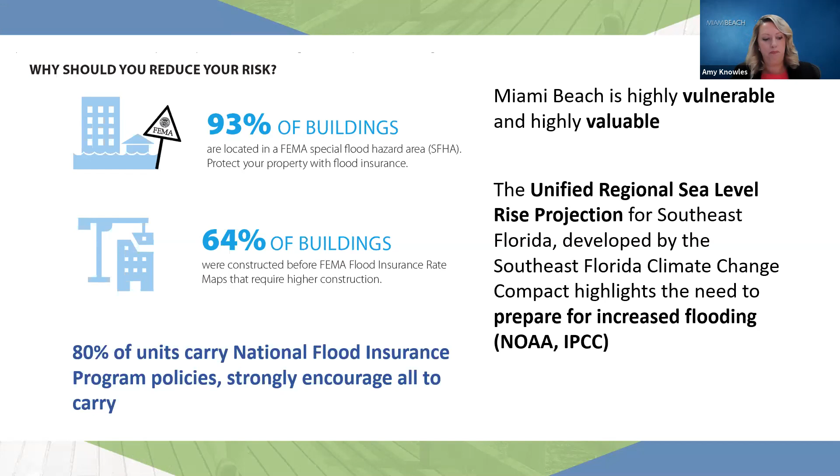So I mentioned every property is unique, and there are benefits of investing in protecting against flood risk. It's very important to note that often there are studies saying that sea level rise in South Florida is in the news. This week, we are always hearing new things, but it's important to note that that's if we do nothing, that the risks we face are if we don't adapt and if we don't make these investments.

So we have also very great recent studies showing the benefits of investing. Most recently, we have a business case analysis of our stormwater program, and that demonstrated that at least $2 billion of investment is reasonable and conservative based on the study assumptions. It demonstrated for every $1 that you spend in your private property, you get $3 in returns, and that city investments in the right-of-way increase property values for each foot of elevation, on average 4 to 14%. So that was a peer-reviewed economic study demonstrating from the city perspective.

More regionally, the Southeast Florida Climate Change Compact worked with the Urban Land Institute and AECOM to do an analysis of our 4 Southeast Florida counties. And that methodology and approach was a little bit different, but also very clear of the major benefits, about 9 to 1 return from Miami-Dade County community-wide and 5 to 1 at the building level. So again, some really good information to demonstrate the importance. Every property is unique, but it's important to know the values there.

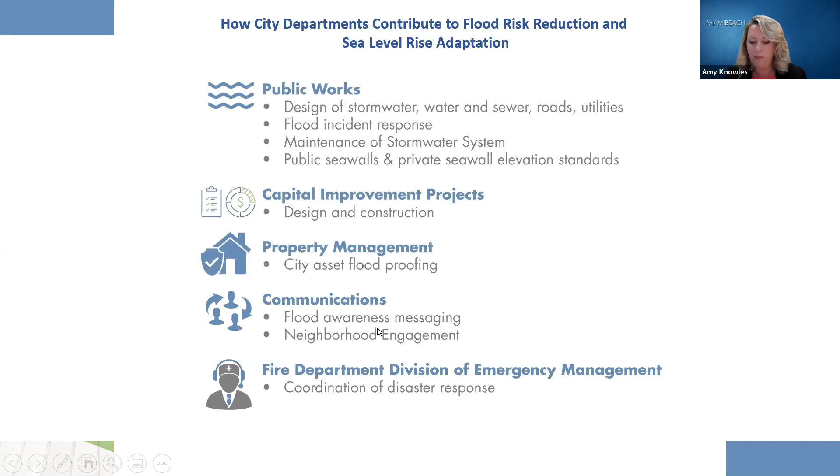So speaking of communications and emergency management, it is very important, while we have you all on the line, to report flooding and stay safe if there is an event. These are two very important messages. And as a city, when we see weather coming that might be a problem, we do send out alerts to make sure people can either move their vehicles or stay safe.

We look at the information, so you can report flooding to the Public Works Department with the information here, or you can also email it. There's flooding on the public realm, which is more public works related, but then there's also those private property concerns. That can go right to the building department to make sure we can address some of those issues, and you can even request an inspection to take a look at that.

So this really helps us, having this information, understand the impacts of these events. So it's very important.

Another important effort the city is undertaking is creating an incentive program to help incentivize flood risk adaptation. This is preliminary, a concept summary, but it's exciting that in November our City Commission approved some funding to begin this resilience effort.

We are very much in the process of developing this. It will need full approval in this year's budget process, but the whole intent is to support property owners to make improvements through a 50-50 matching grant program between the city and a grantee. We're looking at potentially $20,000 per property.

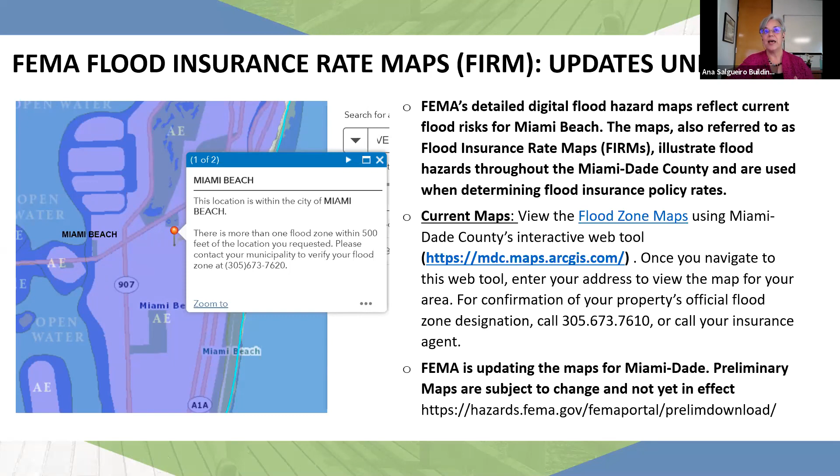So the GIS team from Dade County is actually working on making it a searchable site so that you can put your address in and see the maps from that area, and you can put in any address and look at it, and that will make looking at the maps easier. That should be coming up soon. It's just not available yet.

This is one of the fun things about the new maps. The new maps are in NAVD and the old maps are in NGVD. The difference in Dade County between NGVD and NAVD is about 1.5 feet.

The big difference is if you look at that number 29 after NGVD, that's the year it was established. So in 1929 the NGVD was established, and the NAVD was established in 1988. All GIS tracking and all of the latest survey being used uses the NAVD, and that's a big change in the map. So the new maps will be showing all values in NAVD.

So if you look, what used to be 10 feet would now maybe say 8.48 feet. You're going to see a difference in numbers even when everything stays the same. It's kind of a fun little thing where we're going to start to see the numbers look different even when they've stayed exactly the same.

One of the things we are doing as a city is taking all of the old maps and converting them into NAVD to make it easier for us to do a comparison where we're comparing apples to apples, not apples to pineapples.

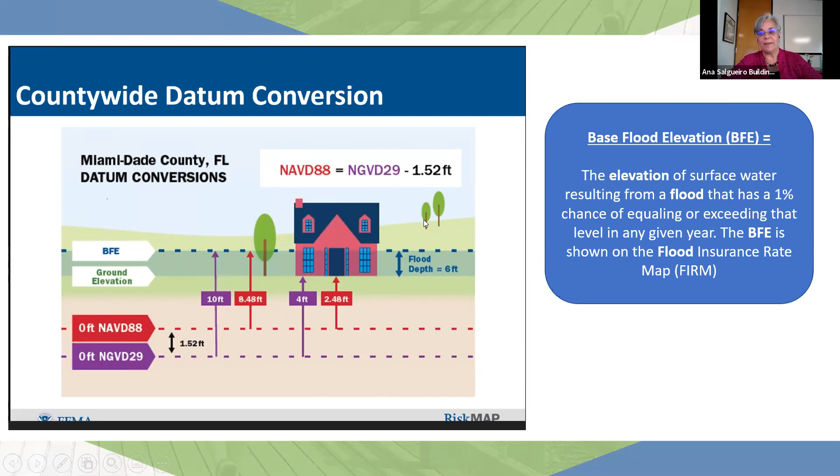I really want to thank Amy, because I had the idea of doing a flood outreach, and Amy said let's do it about the whole thing and make this a bigger outreach.

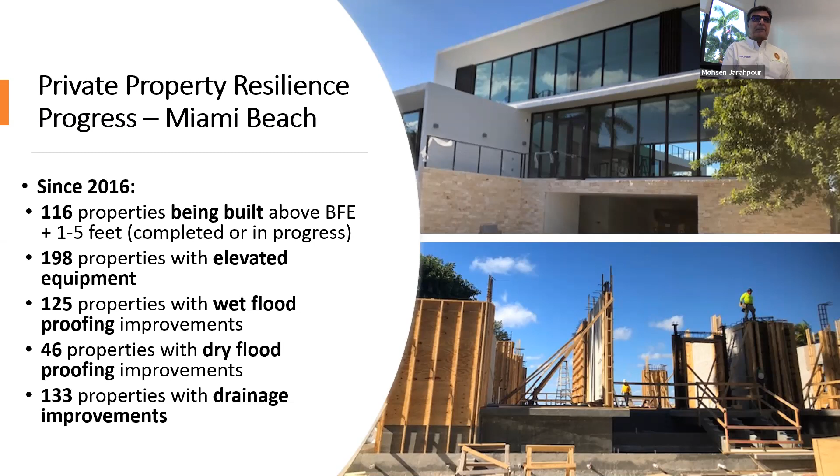Next slide, please. So what we do in the building department, floodplain management division: first we perform plan review and inspection for new construction and existing structures to comply with FEMA and local floodplain management regulations and the Florida Building Code.

We also assist property owners, engineers, architects, and contractors with flood zone determination. We review elevation certificates for new construction and also for some existing buildings to ensure compliance with the National Flood Insurance Program and local floodplain management regulations. We recommend property owners obtain a copy of the elevation certificate for their property to understand their property's flood risk.

We also coordinate the Community Rating System of the National Flood Insurance Program and the Building Code Effectiveness Grading Schedule Program of ISO Insurance Services Office for evaluation and rating review. As a result of this program, property owners in the City of Miami Beach can get discounts on their insurance.

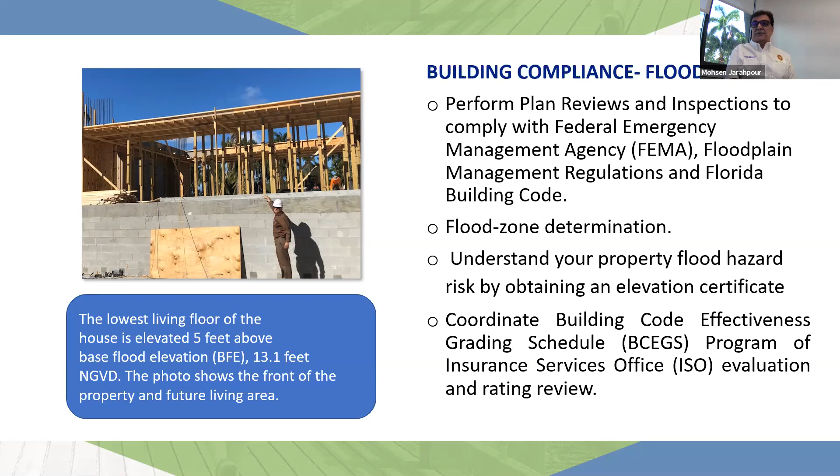As you can see, the photo on the left shows that the lowest floor was elevated 5 feet above flood requirements. Mostly owners do this because they are aware of sea level rise, and also they want to lower their flood insurance rate and lower the flood risk.

So one of the important questions is: what can you do to reduce your flood risk? We can think of three options, three categories, all with goals based on your unique situation. Number one, the owner can do an assessment of their property; two, living with the water; and thirdly, flood mitigation. For the assessment, assess the risk and identify the solution.

For living with water, the goal is to improve on-site water retention and drainage and water quality. For flood mitigation, the goal is to reduce flood risk through building and property retrofits.

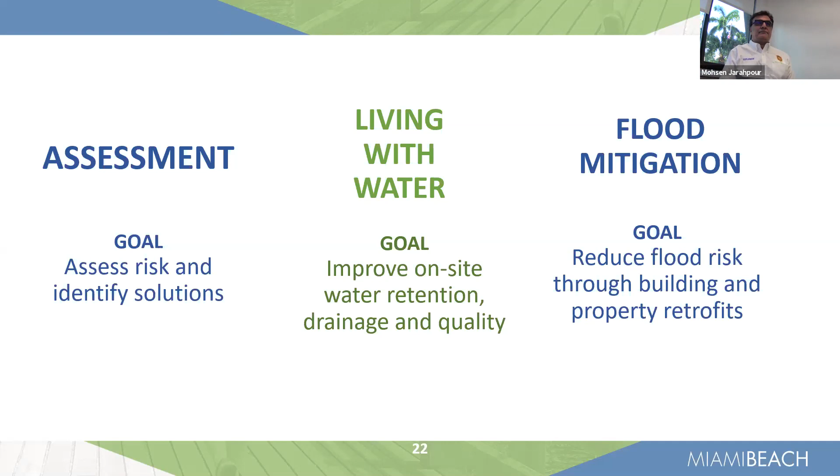So the basics are two methods: dry flood proofing and wet flood proofing. For dry flood proofing, we want to keep the water out of the building. The other option is to have retaining walls either around the structure or around the property, and for dry flood proofing, we want to make sure the wall and the slab are watertight and sealed.

In the case of wet flood proofing, we want to let the water into certain spaces in the building, such as the garage and crawl space, to minimize damage. By having flood vents, we allow the water to come in and get out. We want to make sure all construction material below flood level is flood-resistant material, and we want to elevate equipment such as the water heater and AC.

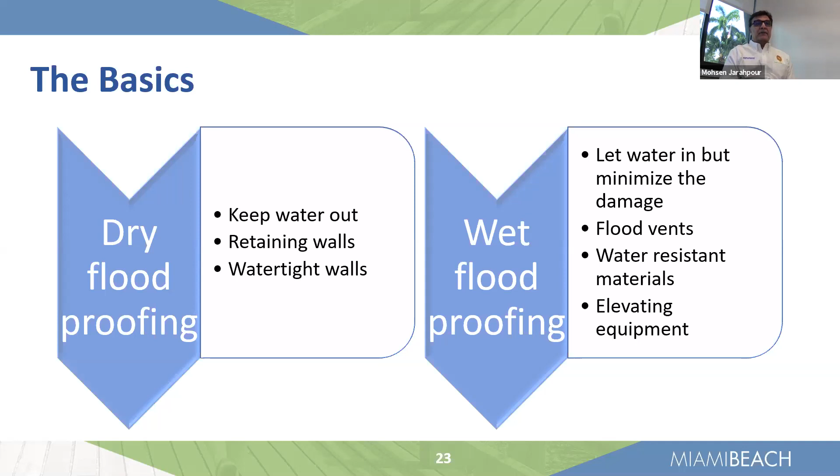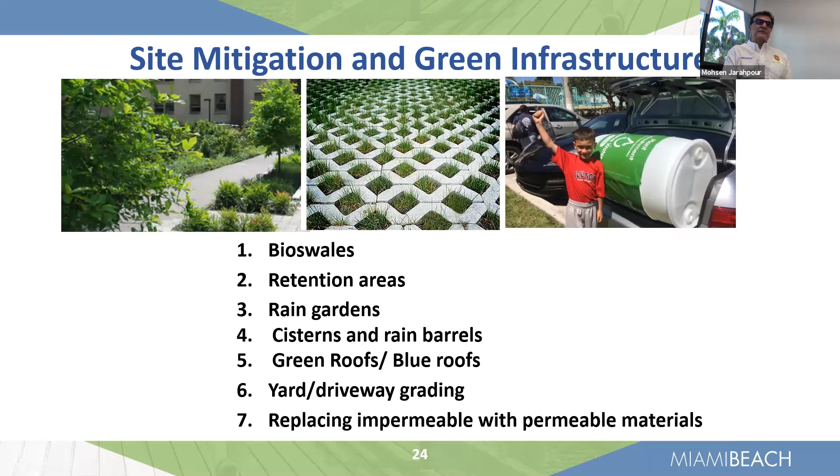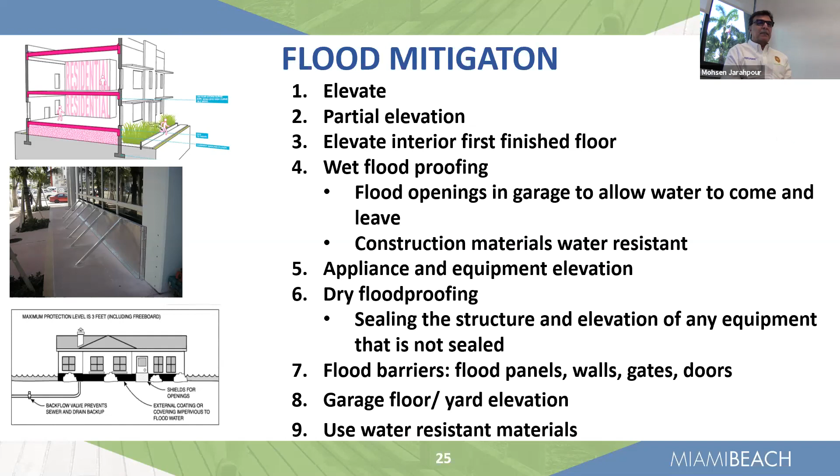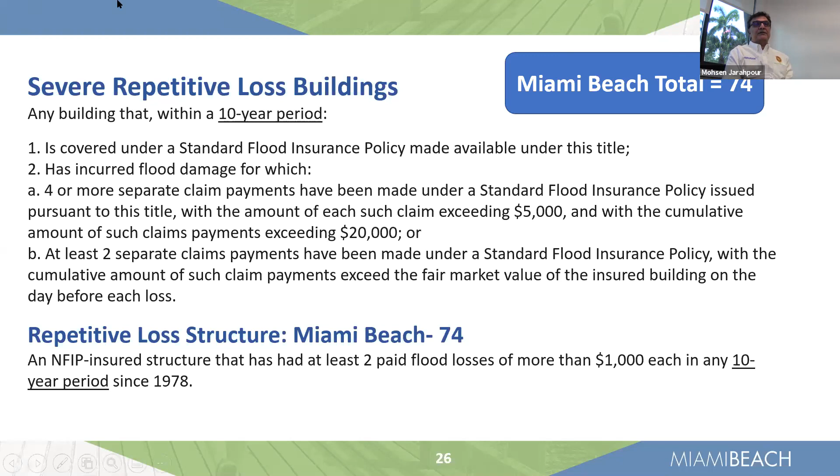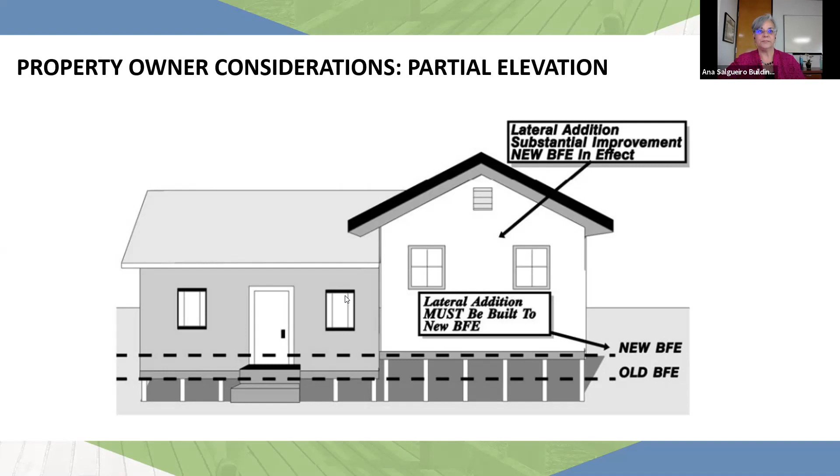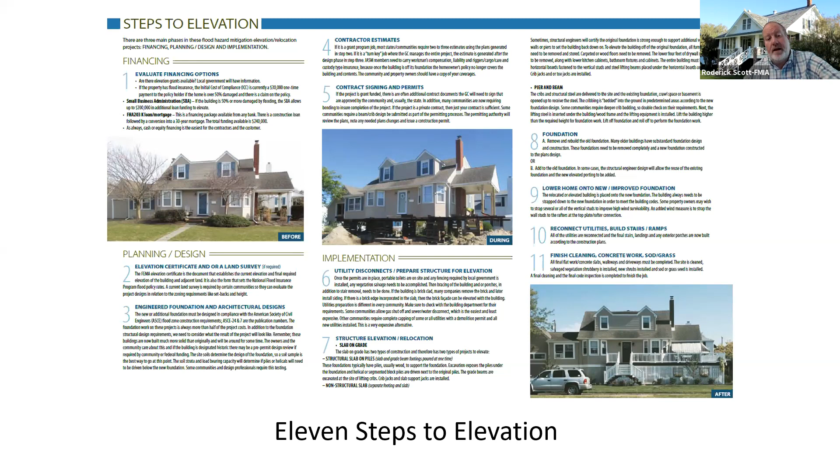So this gives all the steps to the program for elevating any structure. You can see the process here of the non-elevated, elevated, and then finished off with all the architectural details. Next slide, please.

Step 1: figuring out the financing. Where is the financing going to come from for this project? Cash is the easiest to use, and the contractors like it the best. You'll get a better price on cash than working with grant programs. Grant programs, traditionally FEMA and HUD, Housing and Urban Development, take 3 to 4 years to get the money on the ground to the contractors.

Some families don't want to wait that long. I've worked with a lot of families who have paid cash, cashing in some stocks and managing to get money together to just pay for it themselves. So you've got a couple of FEMA and Housing and Urban Development grant programs that come into play. FEMA is before disaster and after disaster.

Housing and urban development, community development block grant.

There's just so many acronyms in all this stuff. It's really confusing. Your head must be packed with a lot of stuff now from the other discussions. Watching this recording over and over again, you'll absorb even more and realize, okay, I know what he's talking about.

The fourth item down within your insurance policy is to make sure you have ICC coverage, or increased cost of compliance. It's an add-on to your supplemental insurance premium and policy, and it's like $5 a year. If you get damaged with a flood claim and have to elevate, it provides you $30,000 in addition to your flood insurance claim, as long as you haven't gone over the $250,000 maximum for residential. So if your claim is $150,000 and you have to elevate, you can access $30,000 to help with the cost of elevating your property.

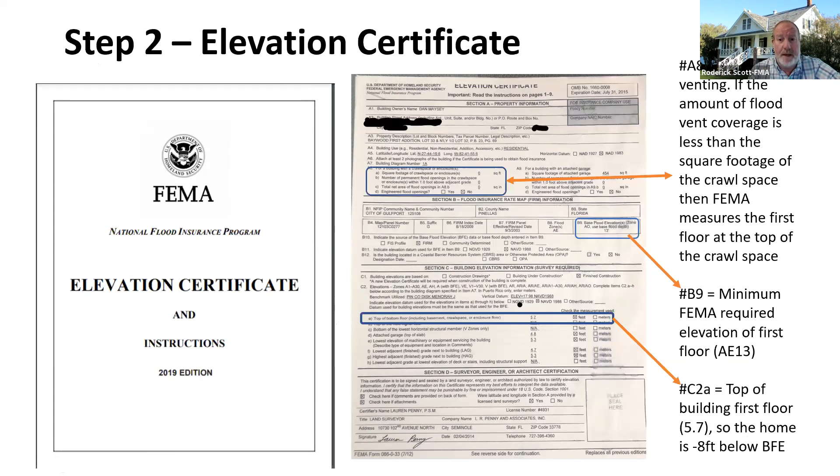FEMA is missing three-quarters of them for their older buildings. So get an elevation certificate, that's my best advice. It'll really pay for itself in information.

Then you get into the design phase. So you've figured your financing, you've got your elevation certificate, so you know how high you have to go, and then they can start computing what the budget would be. If you're in a historic district or historic building, you'll have to go through additional reviews at the city for historic preservation, to make sure these historic buildings look good when finished with this adaptation. You'll get some preliminary designs done—you don't have to pay for all the construction plans at once. You can get some elevations done and go through the permitting process, at least on the review side. But then you'll need engineered plans by a design professional, a licensed engineer or architect, to have those stamped plans to go through the formal permitting process, code review, fire and safety.

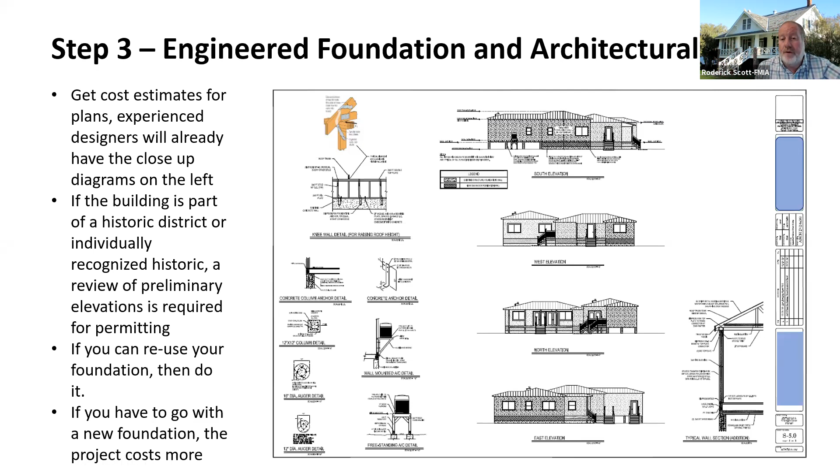Next slide. Oh, and also just real quick, you all are going to watch this again, I know. There are opportunities if you don't have to go really high and you've got a home with a footing, the concrete footing around the base of the foundation that's in good shape.

There are a lot of projects that get to reuse their original foundations and just build up from there instead of demolishing the old foundation and creating a new one. Foundations aren't inexpensive, they cost a lot of money. They're built like battleships nowadays in those flood zones, but you have to see if the engineer feels - a structural engineer has to make that determination.

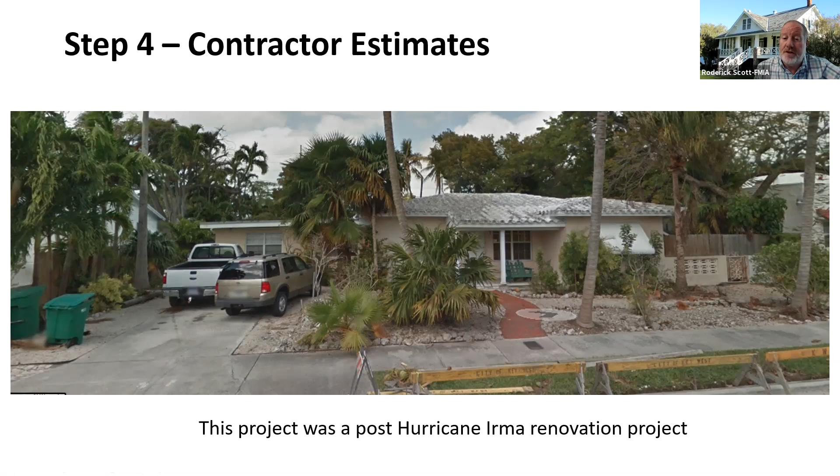So here we have the house. It was actually under construction after the hurricane, and they exceeded that 50% rule and had to elevate. So the elevation company was contacted. The homeowner actually did the contracting themselves, instead of hiring a general contractor.

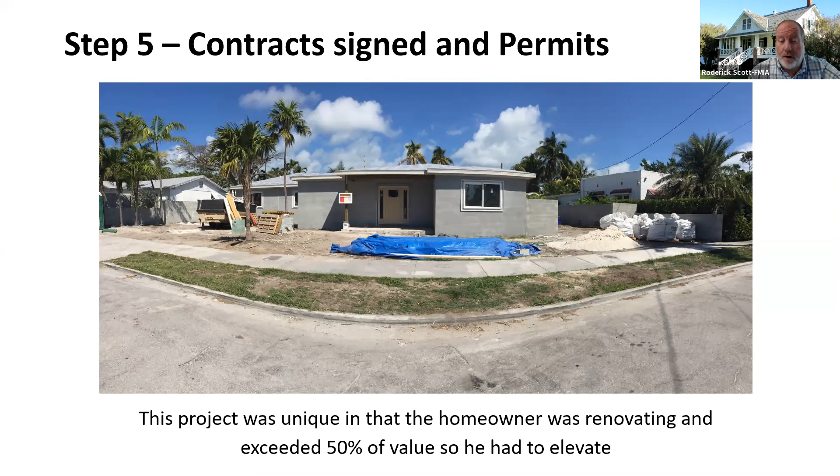So here it is, sort of partially way through the remodel. We came in, laid in, put the steel beams. This is on a slab, not on a crawl space, so we have to actually slide the beams through the walls and create a steel frame.

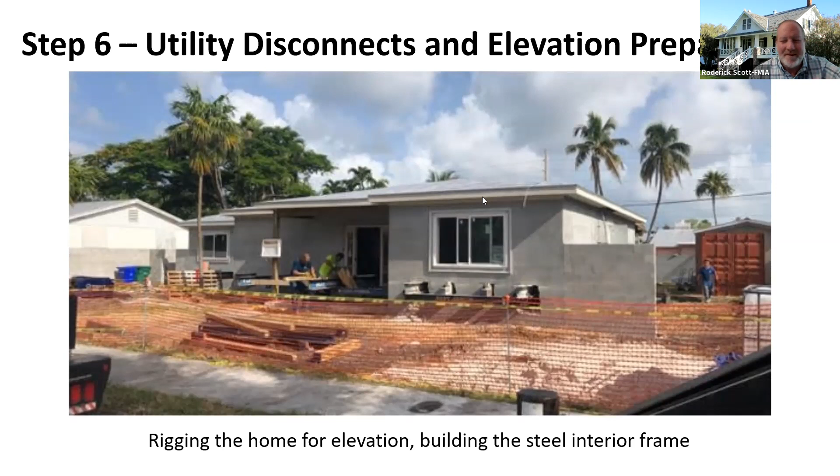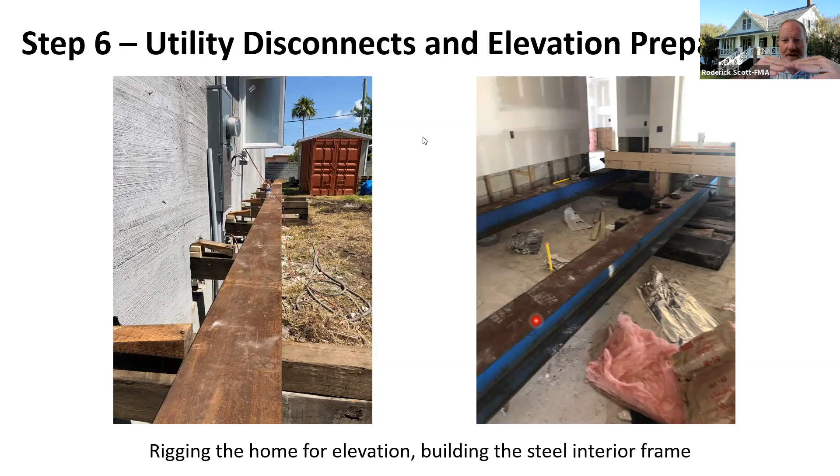A concrete block house weighs more than a wood frame house. So we put this frame together and bring it up in the air and suspend it on wood cribbing underneath, kind of like Jenga blocks. Then the masons can come in, and in this case, we actually reuse the foundation.

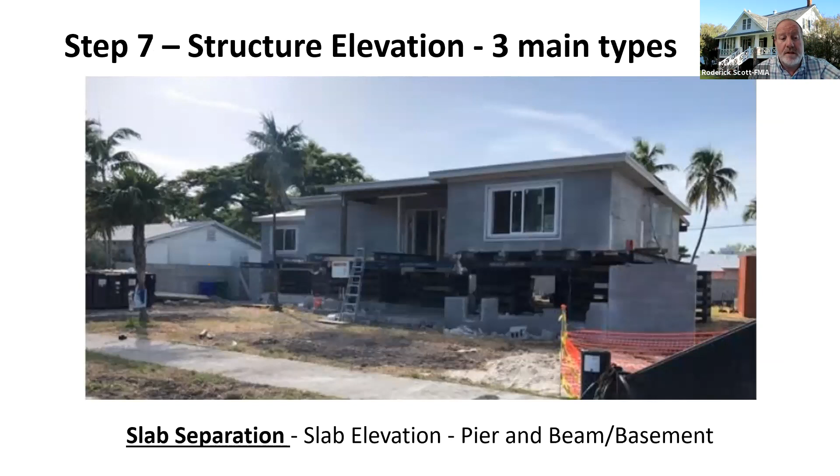Now there's a couple of types of elevations I want to bring to your attention. There's the slab separation, which is the one we're doing here, where we separate the building from its concrete slab. Then there's the pier and beam or basement wood frame structures. So those are the different types of elevations.

Thanks for the little red indicator. That's great, what a team.

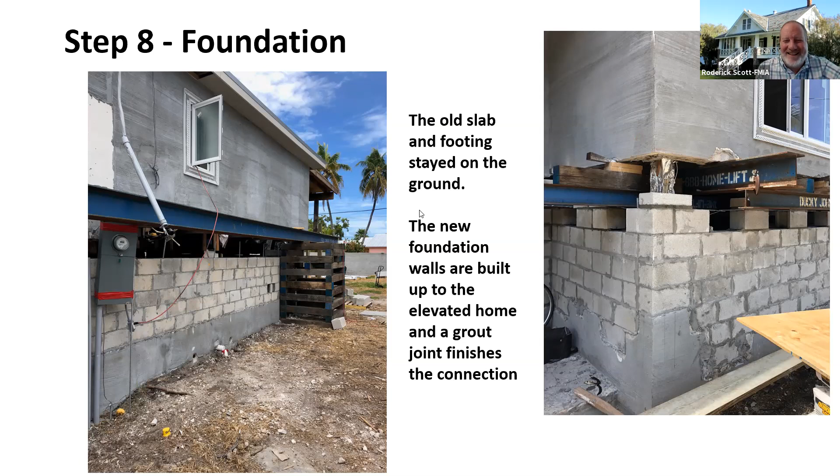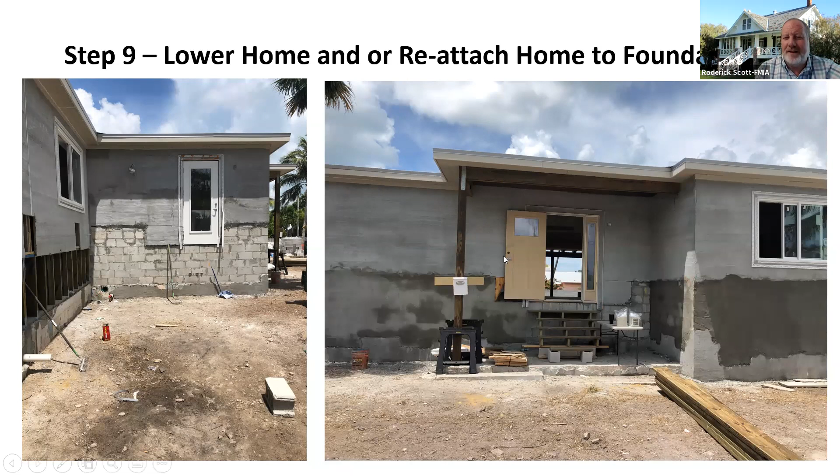So then we go to the left, where we filled in those beam pockets - see the little fill-ins on the concrete blocks there. And on the right, they're starting to put the whole scratch coat of plaster, that initial coat, and then they'll put a finish coat of plaster. That's one thing I do love about South Florida and its architecture, all the plaster work.

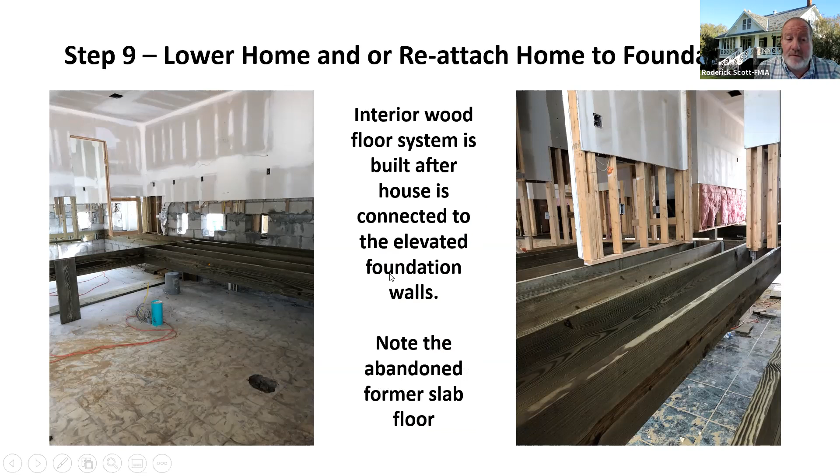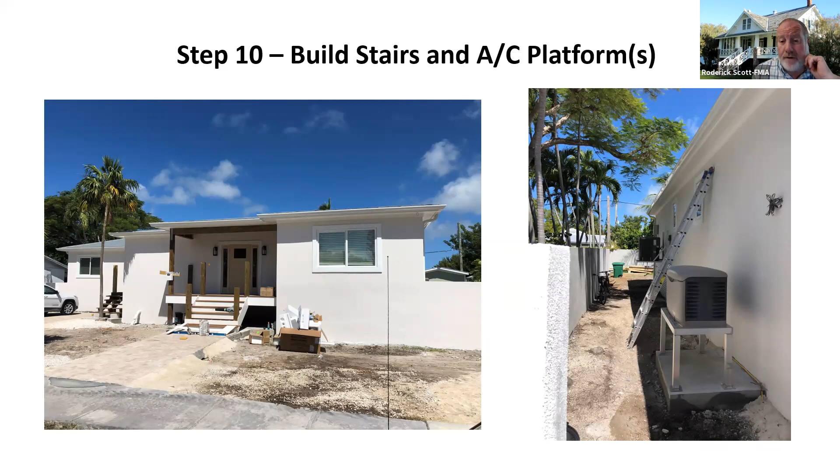On the right-hand picture, you'll see the auxiliary generator. What's the first thing that happens in a storm? Your power goes out and it gets really hot afterwards. So we always say in these climates and environments, if you can afford a generator, it pays for itself in the first storm - keep that air conditioner running. You can see the air conditioner stand back in the background of the generator here, down further. We always recommend that you bolt those down, because if you have existing air conditioners out on stands, wind can blow those off, and that's very expensive - then you don't have air conditioning after a storm.

So make sure your plumber or your handyman goes in and gets those anchored to those stands. It'll really save you in the long run.

And several of their neighbors are now looking at the process. And that's what happens, when you elevate, others that aren't elevated start looking at it. So you get better property value, lower flood risk, lower flood insurance costs, stabilized property values.

The project employed all the construction trades, and our resilient renovation really works for the future of these buildings in these changing environment areas. So I want to thank you, Kevin.